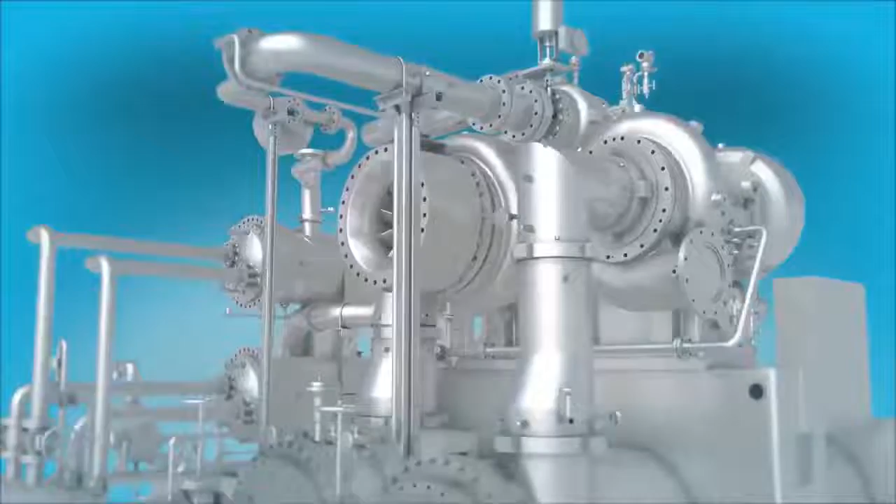Atlas Copco multi-stage centrifugal compressors use integral gear technology, the industry's most compact and efficient turbocompressor design. Our integrally geared compressors are reliable, energy efficient, and specifically optimized to your process requirements.

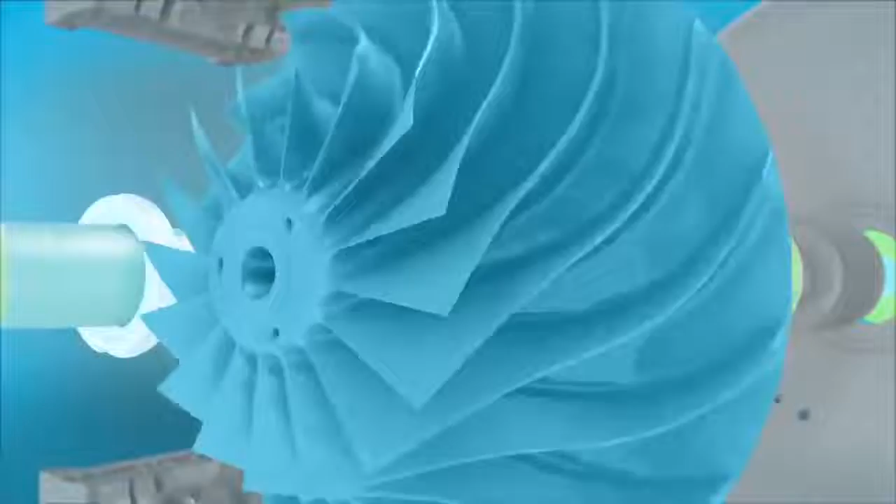Integrally geared compressors deliver multiple speed capability by placing rotors on separate pinions. Each compression stage runs at the optimum speed for high efficiency. Compressor bearings and gears are lubricated by the main lube oil pump, which is driven through the bull gear for reliable oil flow.

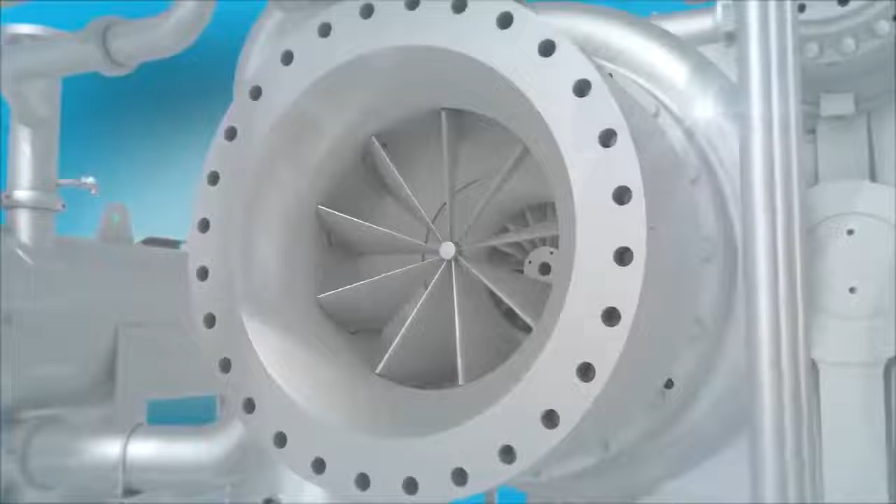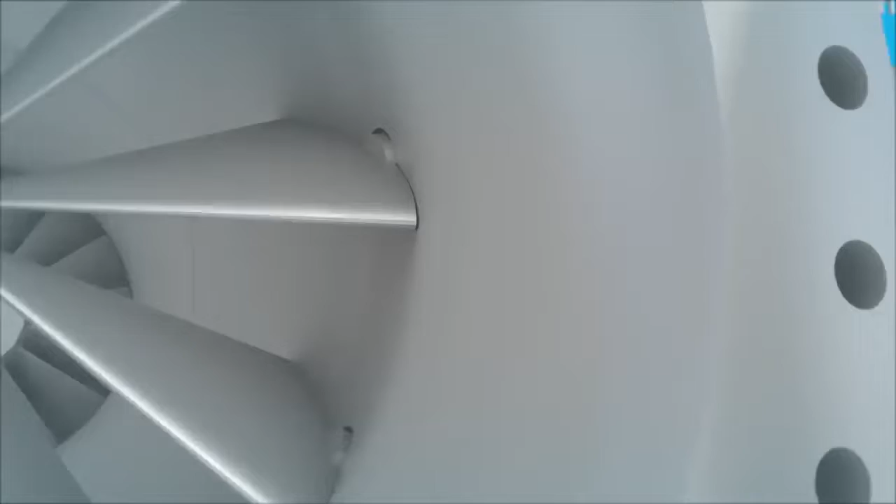The compression process begins with gas entering through adjustable inlet guide vanes, or IGVs, which are standard on all Atlas Copco compressors. IGVs control how much flow is sent into the machine, providing accurate process control. With IGVs, compressor efficiency can be increased by around 9% versus other inlet assemblies.

Our impellers, available in open or closed configurations, impart kinetic energy to the gas. This is turned into pressure in the diffuser and then the volute.

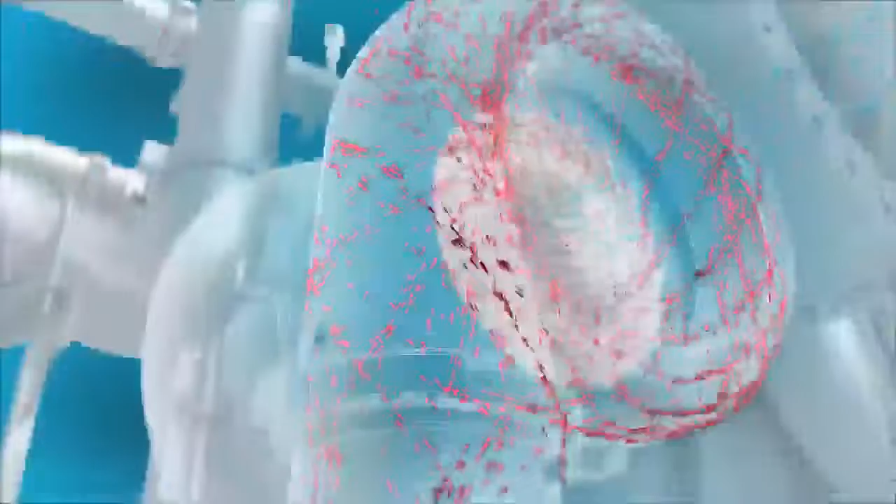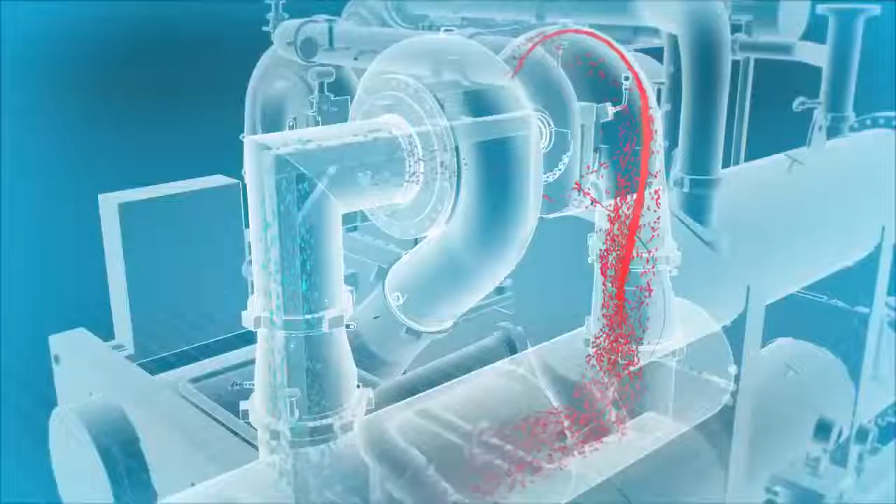Gas temperature rises during the compression process. To improve compression efficiency, interstage cooling can be easily accommodated between any of the compressor stages. Atlas Copco offers a range of intercoolers that are precisely matched to process requirements and meet all relevant international standards.

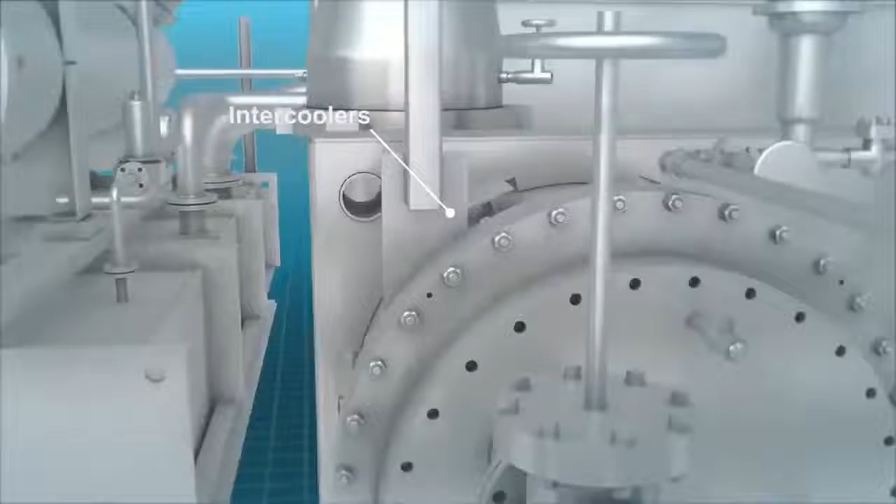In the configuration shown, intercoolers are available in either water in the shell, gas in the tube, or gas in the shell, water in the tube designs.

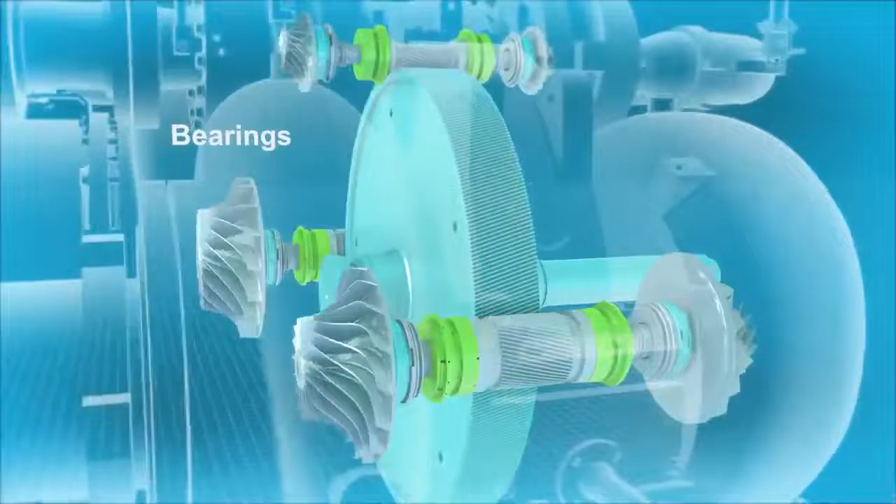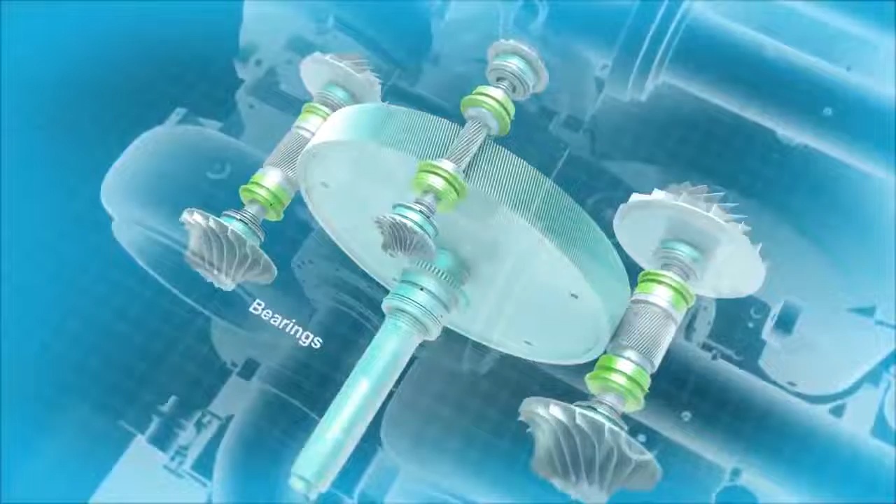High-speed rotors are supported by radial tilting pad bearings that eliminate virtually all vibration, while providing superior rotor stability and smooth rotation. Depending on the application, this can be a combination of radial and thrust bearings.

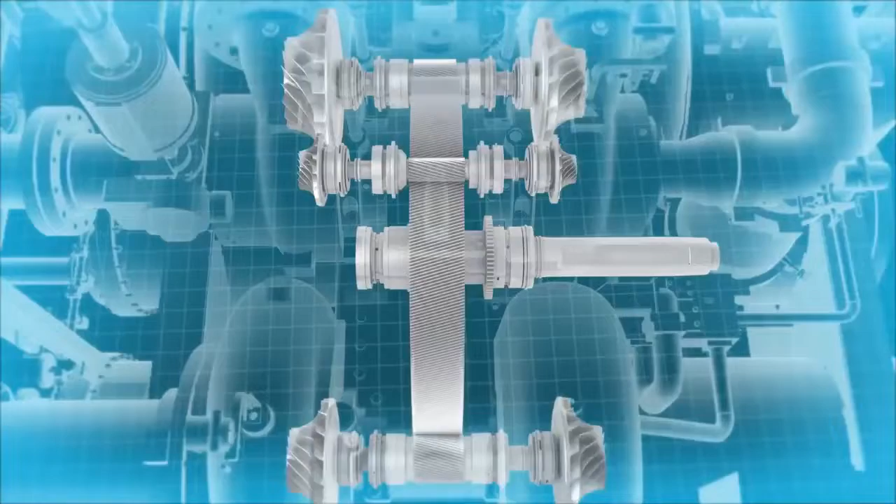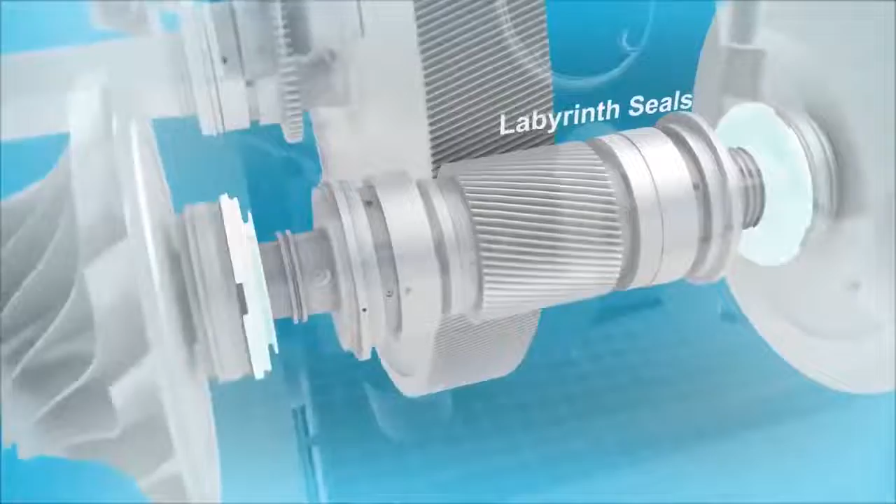The bull gear shaft rotates on multi-lobe sleeve bearings. Compressor sealing options may include dry gas seals, floating carbon ring seals, and labyrinth seals in various combinations and arrangements. Our range of integrally geared...